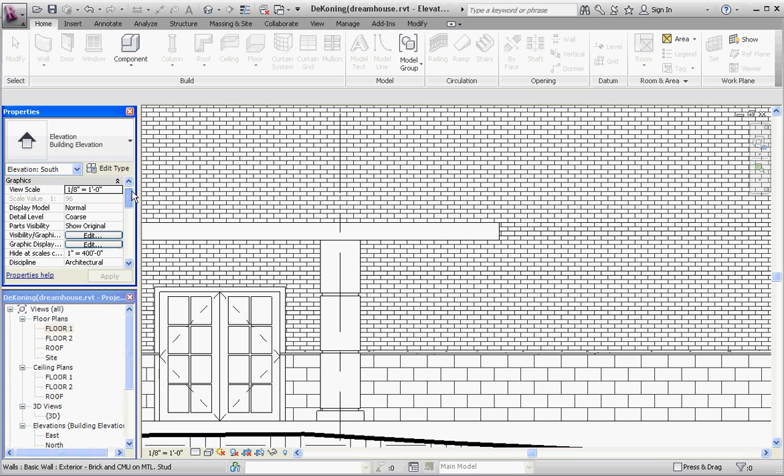So let's go ahead and do this. Let's click on that column and go over to our properties palette to see what options we have. Let's click on that again to make sure we have it selected. It tells us that it's going from the base level of floor 1 up to the top level of floor 2.

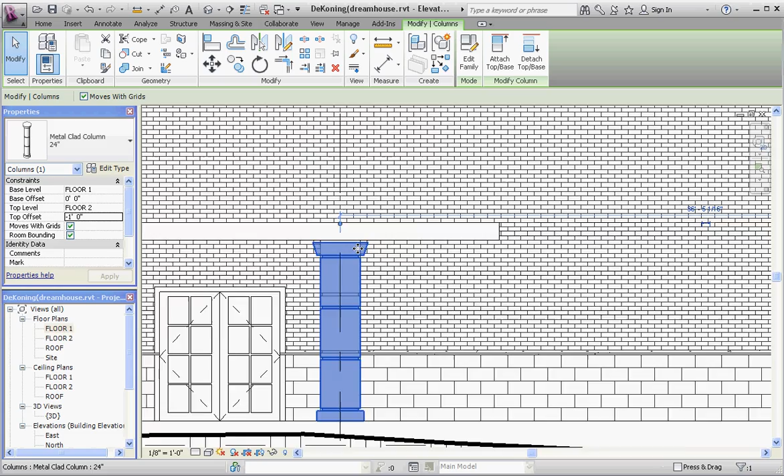It gives us an option here for a top offset. Let's try a negative maybe 1 foot and see what that looks like. Once we press the apply button, it takes our column down and gives us probably a couple inches here where we can continue to play with.

So it's a little bit below the floor. We probably want to correct that, so let's go ahead, while we have it selected, make it a negative 11 inches. Press enter, apply, and it looks like it comes pretty close to the bottom of that wall, which I think is acceptable for this demonstration.

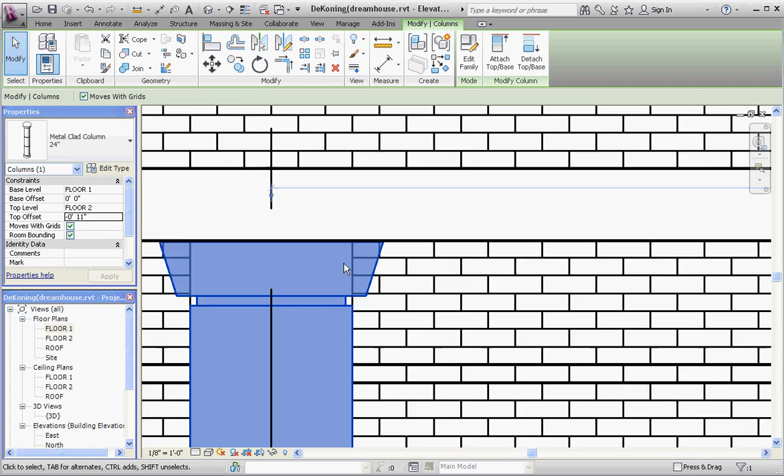So let's go to our 3D view and take a look at that. Kind of a really big deck — you may not want something quite this big, but it does have the columns in the bottom.

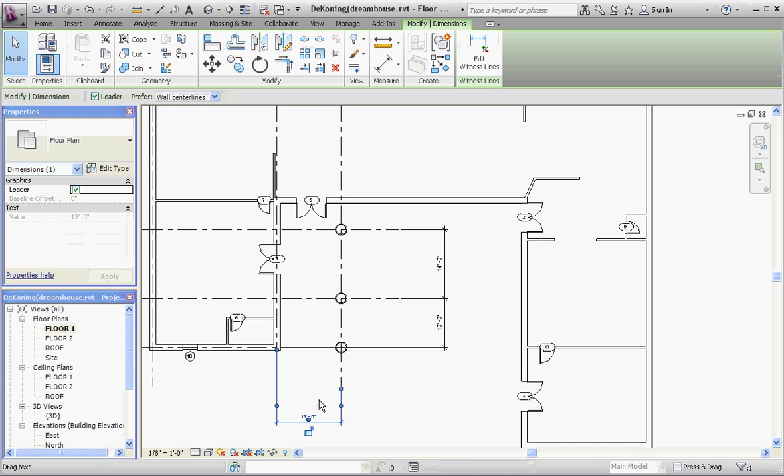The nice thing about this, if we go to one of our floor plans, floor plan 1 is where we actually drew out these grids. Let's go ahead and change these back a little bit. Remember, we can't just click on that dimension and change it — even though it's blue, it's somewhat interactive. I'm going to go ahead and unlock it. What we have to do is click on the grid line in order to change that dimension. So let's make that 10 feet even.

Probably the spacing here is okay too, but if you click on that, let's just be consistent with the other ones and make that 10 feet as well, to bring that back a little bit.

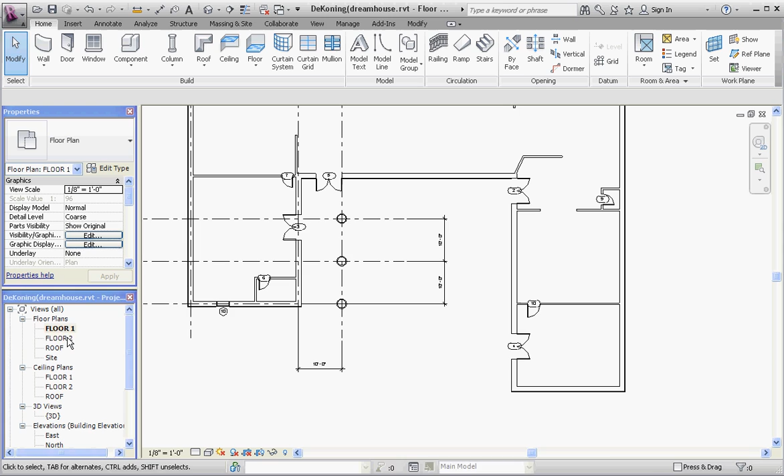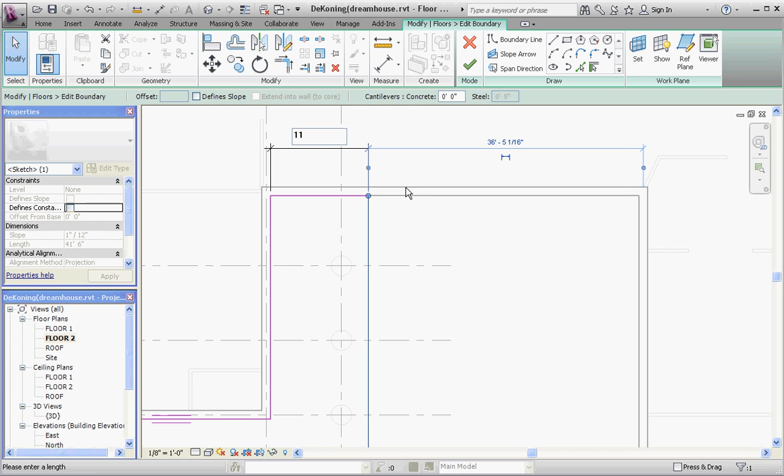Let's go to floor 2 and adjust our floor. If you click on the floor, which represents our second floor deck, let's edit that boundary a little bit and maybe move this line back. We don't have any dimensions on it, although we could make that a permanent dimension — take this dimension and put it over on that line, then change it. Let's click on our line to do that, and change it to make sure it sticks out a little bit over the edge of our columns. Green check mark, and yes, we wanted to attach the walls.

We didn't really want the walls to connect there, but let's go ahead and look at that in the 3D view and see how that looks. Yeah, so that looks a little bit better. We've adjusted the height of this column — it comes to the bottom of that wall, or that floor.

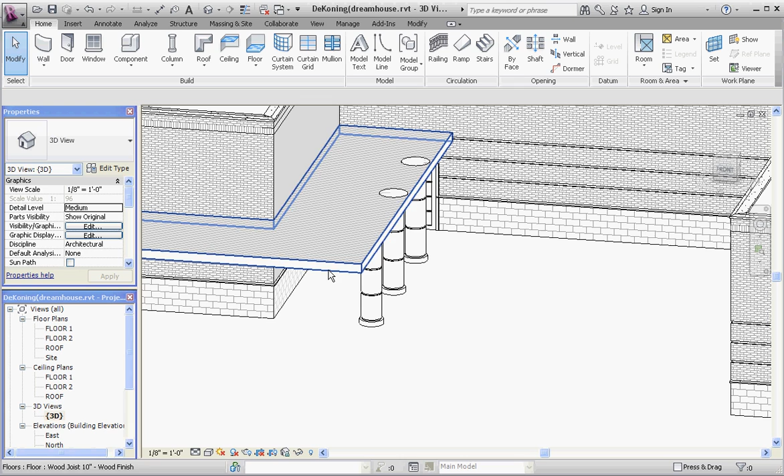These two columns need to be adjusted yet too, because you can see them popping out through the bottom of that floor. But that's a little bit of work you need to do on your model if you want to do that for a deck or some other supporting structure. You probably want to put a grid line out here too in order to support a group of columns that would support the roof deck we drew.

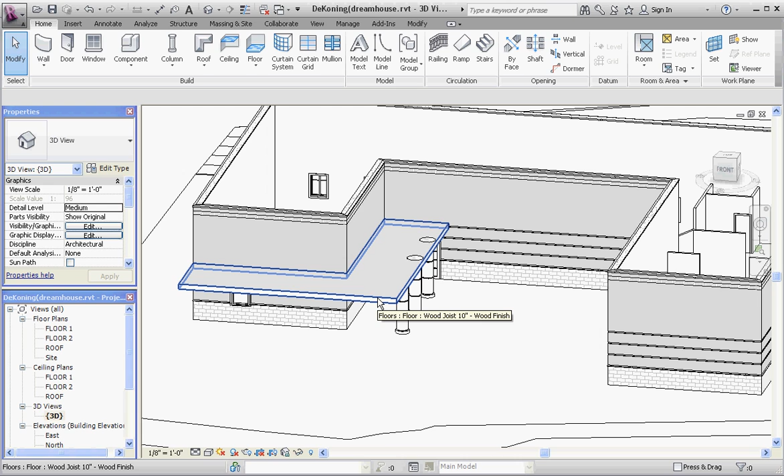Something else that's missing on the roof deck is a door that would come out onto the deck, and railings that would go around it. I'm going to leave those architectural details to you. So thanks for joining me.